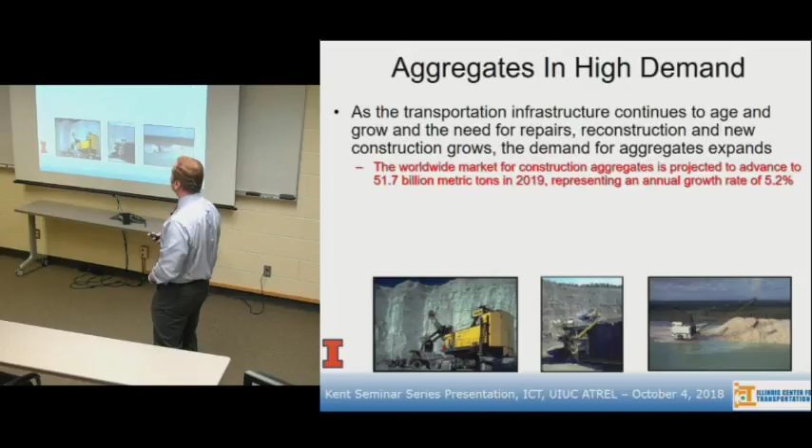The idea is aggregates are always in high demand. It was up to maybe a certain 7% growth rate in the way that aggregates were actually looked at in the worldwide marketplace, construction aggregates in general. Right now, as of recent numbers, I found 5.2% is the current annual growth rate, about 51.7 billion metric tons projected for the production needs in 2019. In the US alone, we have over 3,700 quarries, sand and gravel, and stone producers, and nearly 2.5 billion metric tons were produced in 2016.

If you look at the industry scorecard publication of the National Stone, Sand and Gravel Association, NSSGA, on their website, that's at a value of about $27 billion, contributing almost maybe 5 times that value to the overall U.S. gross domestic product. So what I will talk about has to do with some unbound applications and engineered unbound applications in inverted pavements in my presentation.

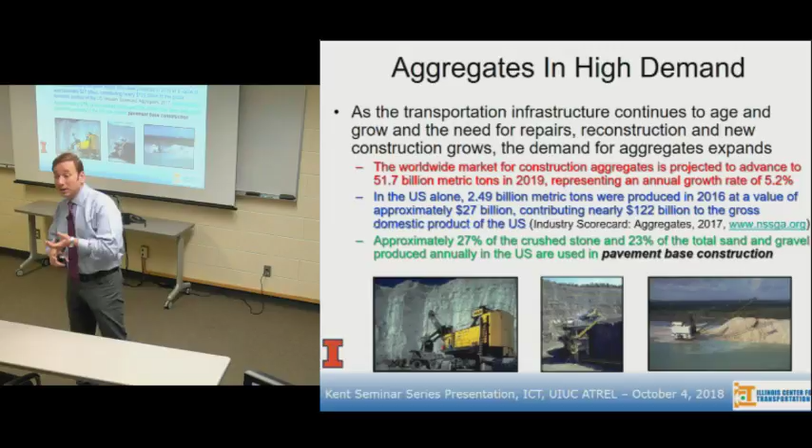So if you think about all these production numbers, approximately 27% of the crushed stone produced and 23% of the total sand and gravel produced annually in the U.S. are used as base course materials, pavement base course construction.

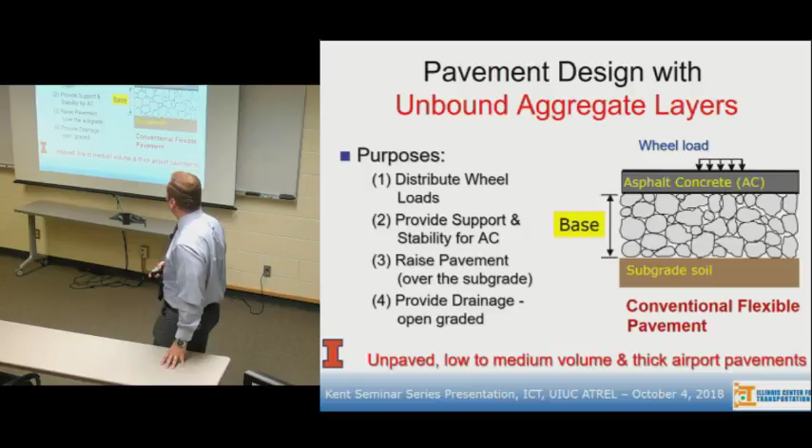That's the inch of aggregate base. We take advantage of aggregate material, crushed stone, especially high quality crushed stone, taking the loads and distributing the wheel loads, and basically carrying all the loads as support for the stability of the hot mix asphalt concrete we build on top. So we're raising pavement over the subgrade this way, and actually in open graded applications it provides drainage as well. But primarily, how strong of a section we build, and what's the function of aggregate in different ways that unbound aggregate, when placed underneath an asphalt concrete and over a stiff foundation, is what we will talk about, which is the inverted pavement design.

And in a lot of cases, thinly surfaced, low to moderate volume roads, and thicker airport pavements. Now, we have a lot to be gained by better understanding, better utilizing aggregate products.

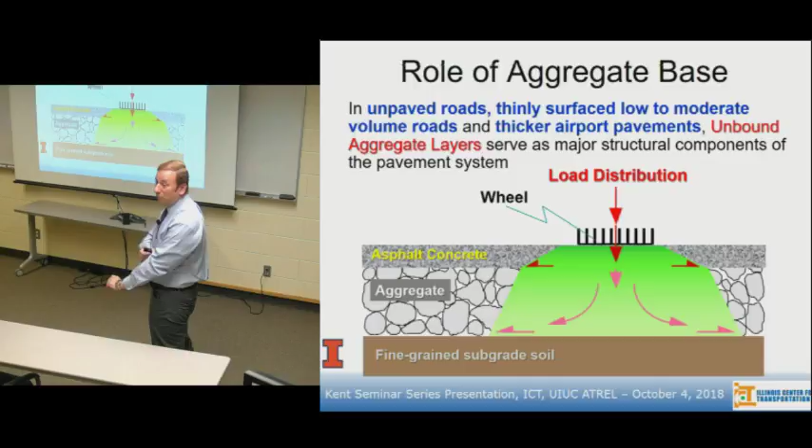So we need to bring a full spectrum of sustainability solutions in the way that we're using and utilizing unbound aggregate materials. Having said that, when you look at the production in the quarries, a lot of those quarries, as I mentioned, they need to be moving into research, and research that leads to advances in aggregate technology and innovative products and applications needed to target specific transportation projects.

We need to bring sustainability by matching future regional needs with the availability of resources. Do we have in a project nearby quarries that will actually produce high quality aggregate for you? If not, where to go and how far? You all know that transportation is a big cost that comes into this. In the production stage, there is the conservation of energy and water and everything else that goes into the sustainability picture.

There is the beneficial use of microfines and quarry byproducts. These are typically the waste material, byproducts generated from crushing operations and multiple crushing that takes place, for producing your unbound aggregate dense graded base course. One of the recent projects dealt with quarry byproduct, which I will also give an example of towards the end of my presentation. So this is the production end.

How can we use these aggregate layers, unbound aggregate layers, in a sustainable way by looking at the current needs and deficiencies or limitations, or current sustainable alternatives to bring recycled material, local materials, and other things? I have 3 slides to just highlight some of the points on these, because I will tie eventually these points to an engineered use of aggregate base, which is inverted pavement design. So when you think about most of the asphalt concrete surface and Portland cement concrete surface pavements, rigid and flexible pavements we look at, these are energy intensive bound layers.

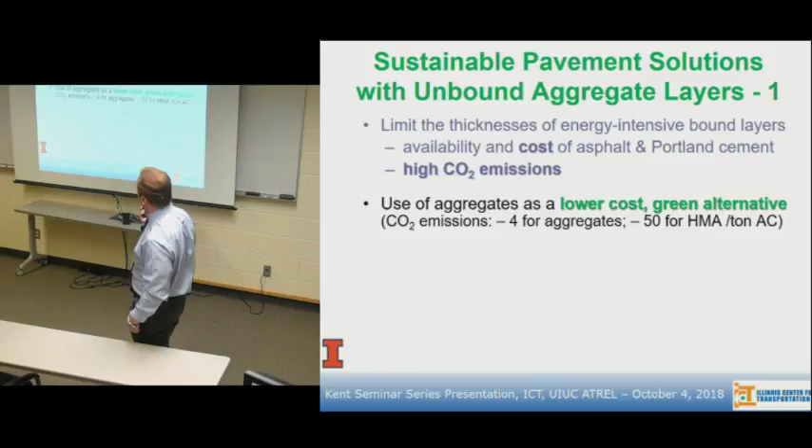A recent report I was looking at gives an overall comparison between aggregate production and hot mix asphalt production. Of course, aggregates are needed for hot mix asphalt. What's the percentage of carbon dioxide emissions coming from each component? If hot mix asphalt altogether per ton is about 50, the contribution from aggregate is about 4. So aggregate production is actually quite sustainable compared to the asphalt binder and the HMA.

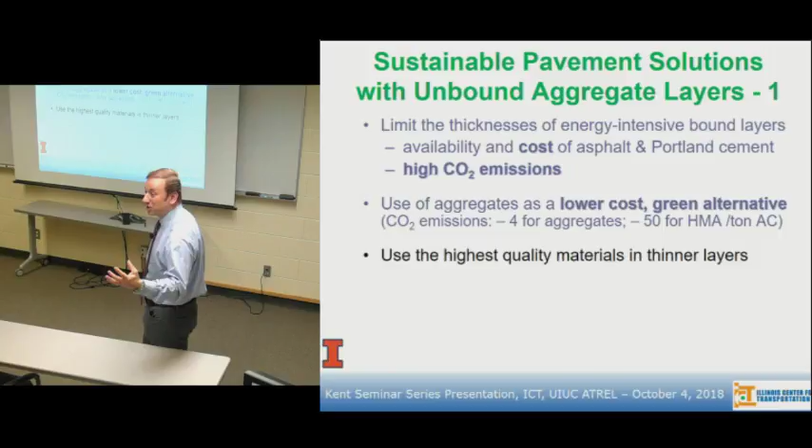So using high quality materials in the right places, say higher quality materials with thinner layers, will help us achieve that perspective — maybe using more aggregate materials with good properties. But we also have the challenge of using a lot of local aggregates, because that's what we have in the immediate surrounding quarries, and most of our quarries are carbonatic rocks. Maybe they're not as strong and durable as some igneous rocks. Local aggregates can sometimes be marginal, but how can we actually make the best use of those?

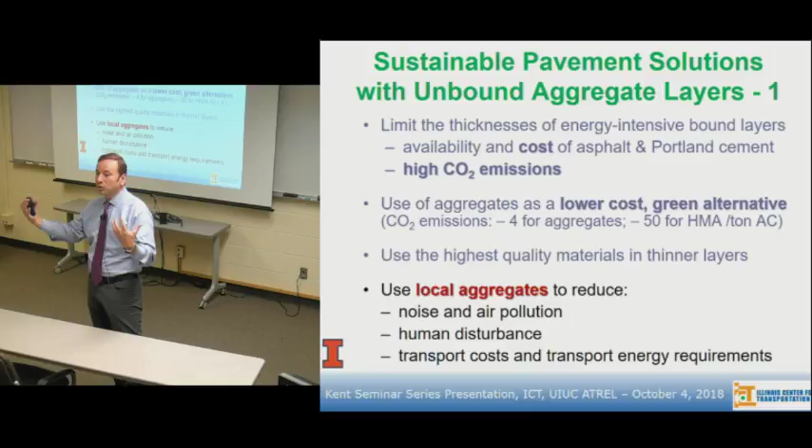In order to do that, there are environmental effects to consider. If you're using local material, you don't have to transport it, so you minimize noise, air pollution, human disturbance, and those kinds of things — but transport cost is obviously the big factor in the final product. So if you're putting this material, not the highest quality but local, under a certain thickness of asphalt, it's going to perform very well since it's not going to get a lot of stress or load on it. So there are clever ways we need to engineer the use of both high quality and lower quality materials to take full advantage — that's the kind of engineered use.

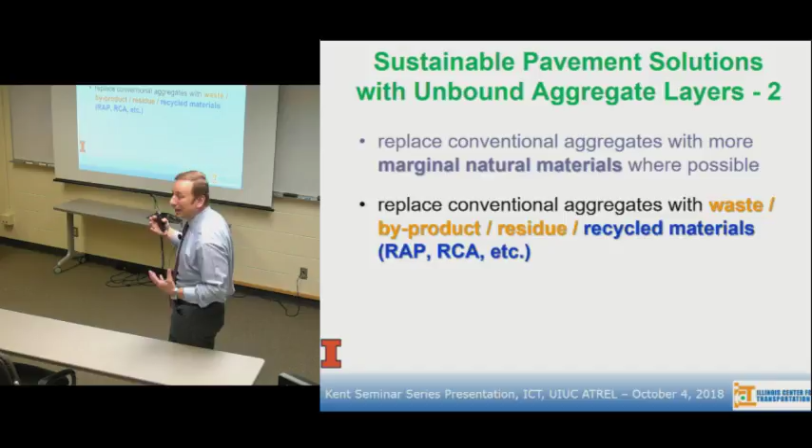Another example is conventional aggregates versus these marginal natural materials as aggregates. As I said, better making use of those in places where we don't get a lot of loading or stresses — they'll perform fine, but you don't want to put them under very high loading conditions.

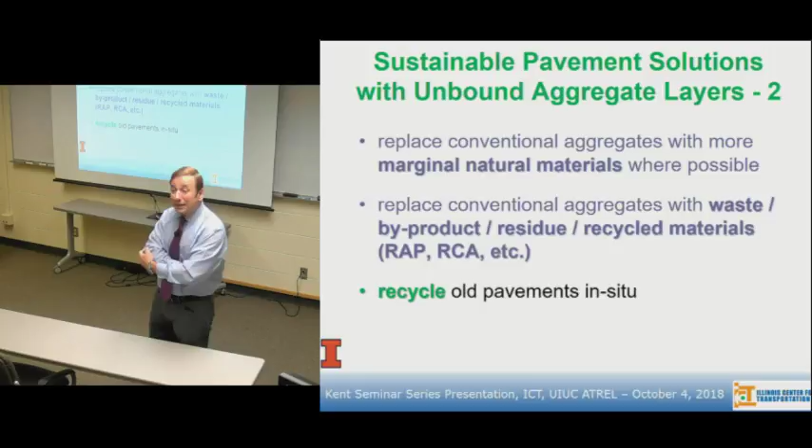We are also under the challenge of reusing and recycling some of the old pavements. That's common as we keep rebuilding, maintaining, and rehabilitating old pavements. Recycling is a big thing we need to bring in — recycled aggregates, RAP, RCA, as well as quarry byproducts and wastes, as I talked about. We have to think more about bringing these into our sustainable solutions. Recycling old pavements in situ — I think Tollway does this in the best possible way up there in Chicagoland. This is the kind of thing we should always be thinking about doing more and more.

Finally, in the third slide of my sustainable solution ideas, that links back to the engineered uses of different qualities of materials, which we can achieve by advancing our ways of characterizing materials and understanding their properties. That really directly links to the topic of this seminar, which is the engineered use of aggregate base in the inverted pavement scenario.

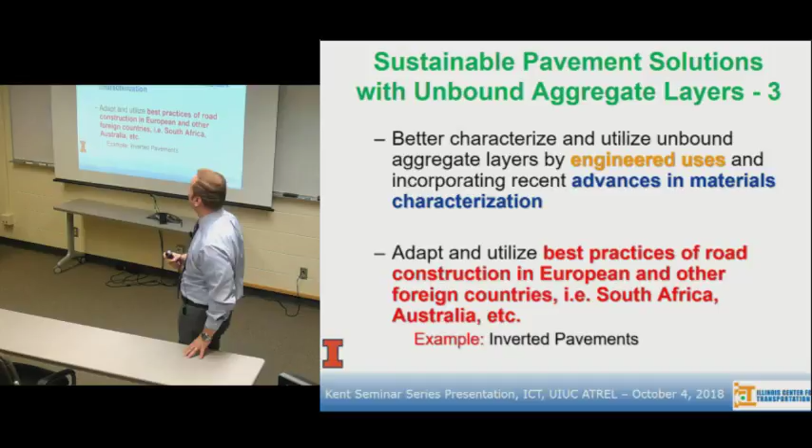Interestingly, back in 2002, there was a scanning tour by the Federal Highway Administration, observed in countries like South Africa and Australia. This was the 2002 report from that international scanning program, which observed in France, South Africa, and Australia some pavements that really outperform their design lives — quite durable, quite long lasting, with great longevity. What do they do to take advantage of these different pavement designs, and how can we bring them to this country? That was the idea of the scanning program.

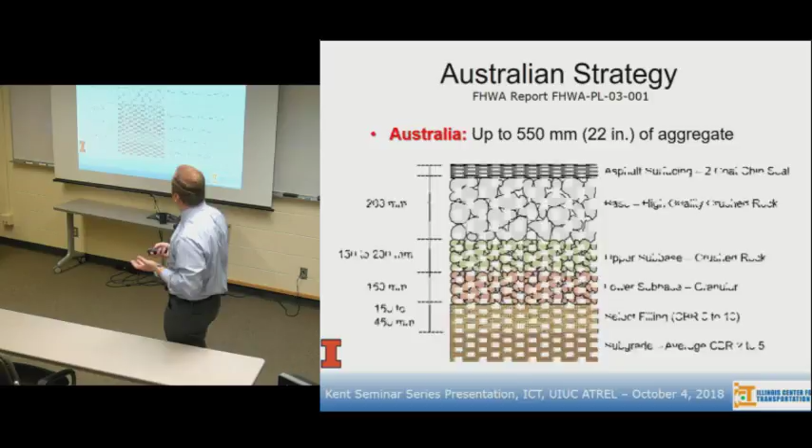What came out of that scanning program, I will show you two countries' designs: Australia's and South Africa's. You'll notice they all build up these pavements from the bottom up, as is the case in Autobahns and German technology. Look at this section, which utilizes different qualities of aggregate material in building up, well, this is a flexible pavement.

It's a flexible pavement, but just like your flexible pavement with surface treatment. It's actually a two-coat chip seal, maybe not more than an inch on top as an asphalt surface. And underneath that, we have up to 22 inches of aggregate layers, on top of the prepared subgrade, with a lower subbase and an upper subbase.

Qualities go from the bottom to the top: lower, upper, and then base quality is quite high, because with that kind of thin two-coat chip seal, there's a lot of stress coming into this granular base. It better be high quality.

This is Australian design, building up from the ground up, and then you don't have such thick asphalt concrete layers. A similar design is South African, and this is the inverted pavement.

This is how they construct it: on top of the subgrade, about typical 6 to 8 inches, 15 to 20 centimeters, of cement-treated subbase. Notice, 3 to 5% cement. What percent cement do we have in concrete? 15, 16 percent, that's heavy. You don't want to go too high in cement content. This cement-treated subbase becomes a stiff platform to build this high-quality crushed stone of only 6 inches, and then 3 to 5 centimeters, that's up to 2 inches of asphalt concrete on top.

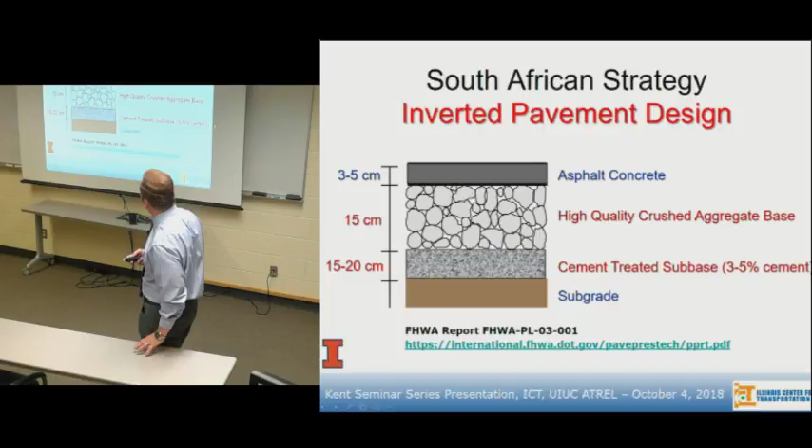Well, it does work because they're doing it in an engineered fashion. They're taking advantage of all the good things in that inverted pavement design, and that way they're spending less money while getting the performance out of that road.

They're green and sustainable alternatives because they're engineered alternatives. They make optimum use of the compressive characteristics of the unbound aggregates. If you look at this cross-section of an inverted pavement, really the neutral axis puts down below towards the subbase. The stabilized subbase, with a higher stiffness, puts the aggregate layer, that 6-inch granular base material, into compression under the bending of the load. That's how the compressive characteristics come in, and in compression, unbound aggregates are great. Not in tension.

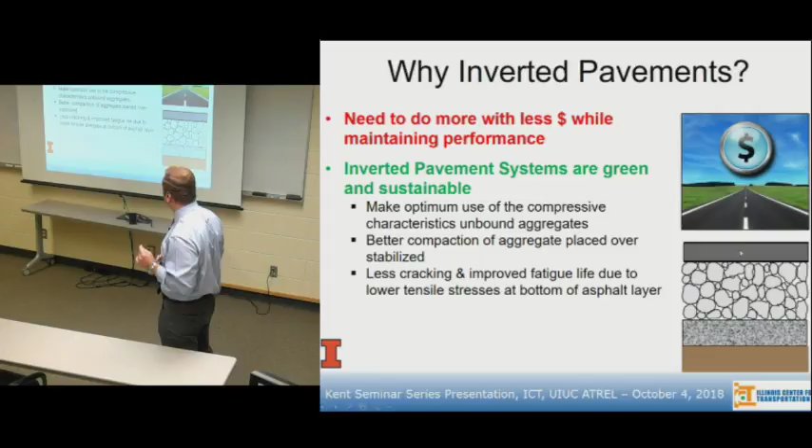The reflective cracking potential is also minimized because you don't have a high cement percentage, only 3 to 5%, lightly cemented, so it's not prone to shrinkage cracks due to low cement content. It does a great job because deviator stress on top of the subgrade from wheel loads is very little, we're talking about 1-2 psi level, because it's already buried under a stiff subbase. The result is improved pavement performance. That's really the key about inverted pavements.

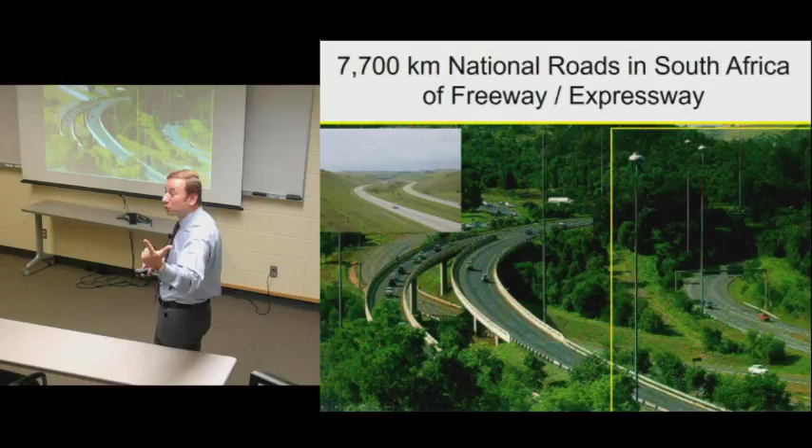I have some slides I'll go through that I borrowed from Dr. Morris De Beer from CSIR, the Council for Scientific and Industrial Research over in South Africa. He was talking about the 7,700 kilometers of national roads in South Africa, giving a picture of how they managed to build all these asphalt pavements, many of them inverted pavements, with a high quality crushed stone base, by material quality as well as construction quality, maintaining high quality base courses.

That's what they call a G1 base. On a typical main national highway, you have 12 to 50 millimeters of asphalt on the surface, almost up to 2 inches, and you can get by with that thinly surfaced asphalt serving high traffic loads.

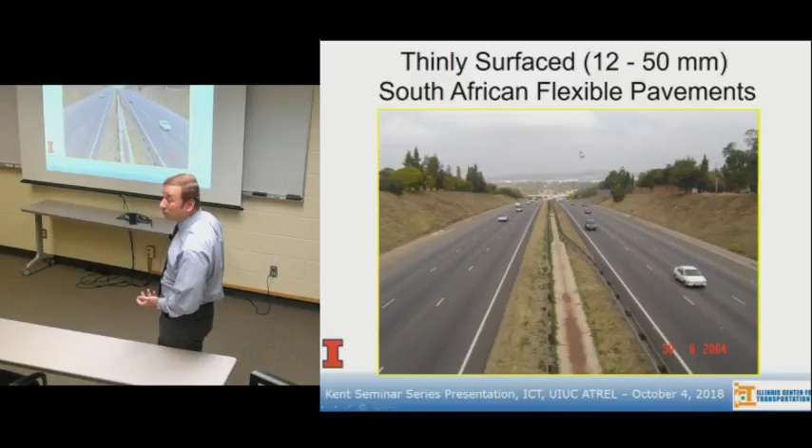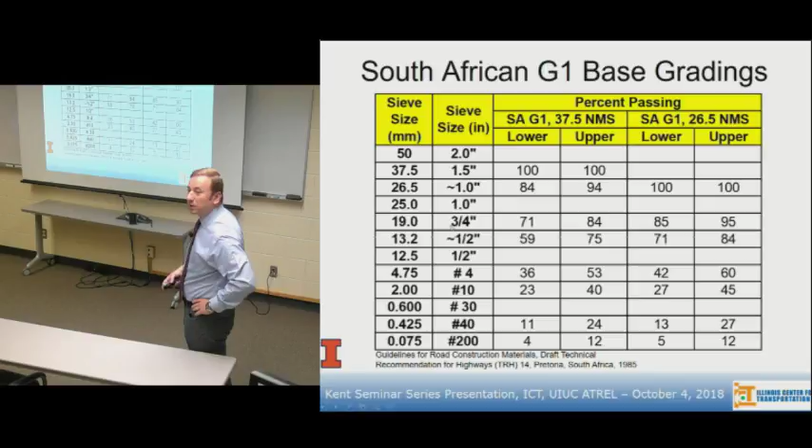Okay, what's a typical grading envelope or grading band for this kind of high quality South African G1 base? They have a nominal maximum top size of about 37.5 or 26.5, so 1 inch, 1.5 inch top sizes. Typically inches are here, sieve sizes, right? And these are typical densely graded bases for well-graded gradations.

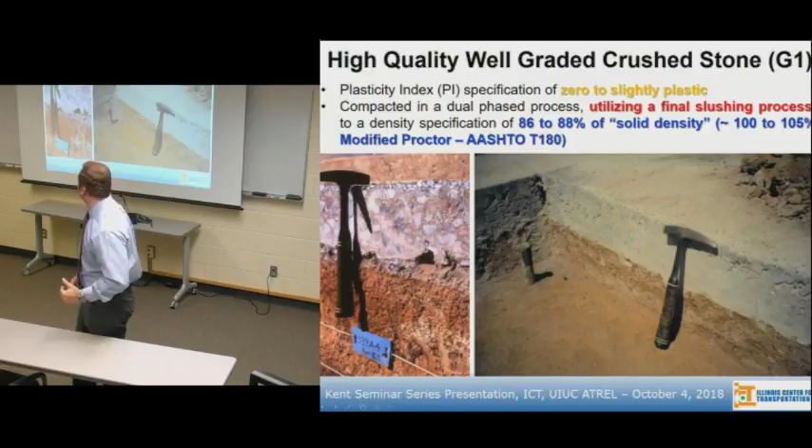This shows you the different stages of the process, but notice this thing, the wetting and slushing, with the rollers actually getting the moisture out full of fines. Basically, they're flushing the fines out once they finish compaction.

All right, there's a quick video here, if I can get that to run, to show you that process, which is very interesting.

The compaction process consists of firstly a standard compaction phase and secondly a particle interlocking or slushing phase. The standard compaction phase uses the customary method of compaction for gravel material to a minimum density level which will allow the second phase to be executed successfully.

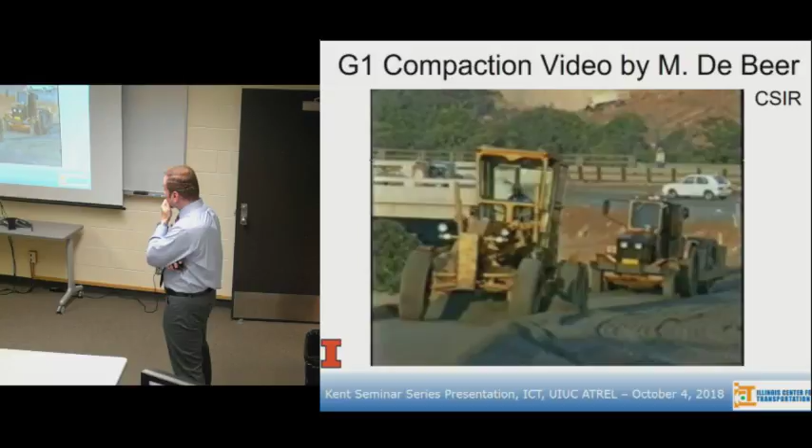The first phase of the compaction process should start immediately after the layer has been correctly shaped. The material should be at optimum compaction moisture content, ensuring that the matrix can be normally compacted to the minimum first phase density requirements. While some deviations to the basic approach to G1 compaction have evolved over the years, mainly being solutions to variations in material quality, available equipment, and local conditions, the original method will be described here.

To start the compaction process, layer shaping is initiated by using a grid roller for 2 or 3 passes at a slow speed to gently knead the material into position without altering the gradation.

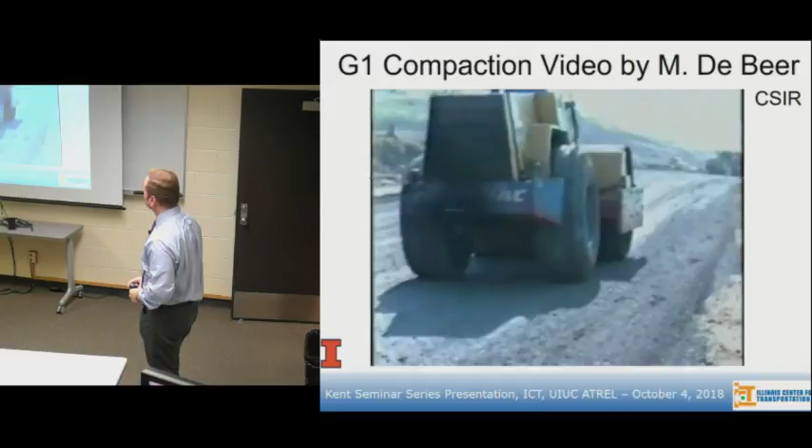Compaction is continued using the vibratory roller. The first pass is normally rolled without vibration, just to settle the material. Thereafter, rolling is done at a relatively high amplitude and low frequency for another 2 to 3 passes. The amplitude is then set to minimum and the frequency to maximum for a further 2 to 3 passes under vibration. Caution should be taken not to over-vibrate the layer and cause de-densification.

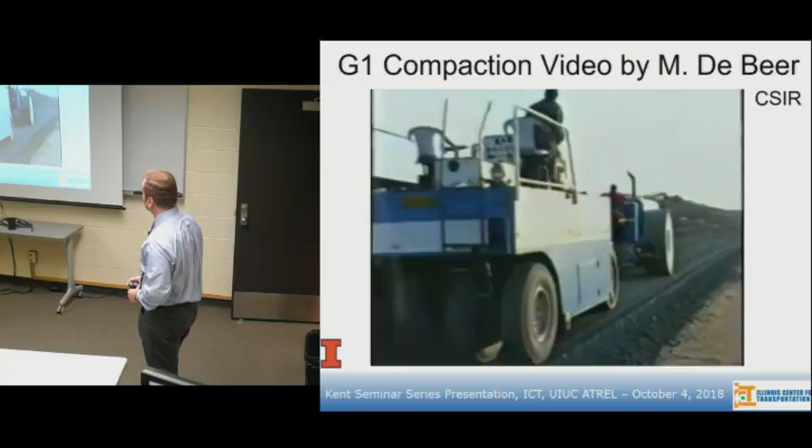Other non-vibratory rollers may assist, especially the heavy pneumatic tire roller. Note that the compaction rolling should start at the outer edges or lowest cross-section side of the pavement and progress towards the center or higher cross-section side of the pavement.

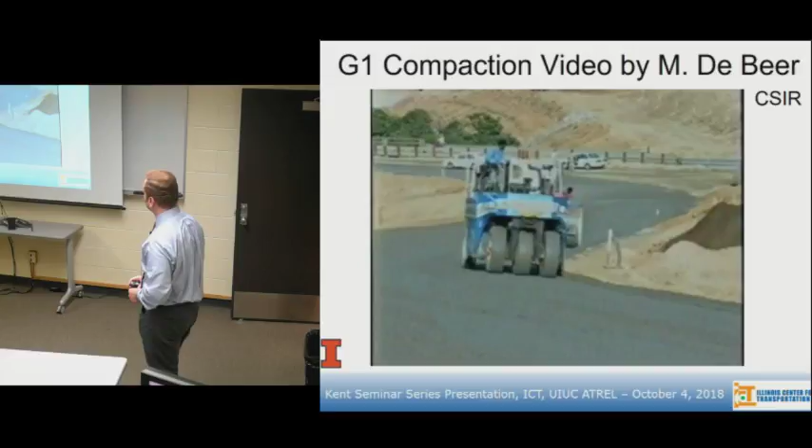Successive passes with the driving wheels leading to prevent bow waving of the material and corrugation formation should be applied in the same lane in opposite directions. Caution should be taken not to crush the particles and hence alter the gradation or to deform the surface.

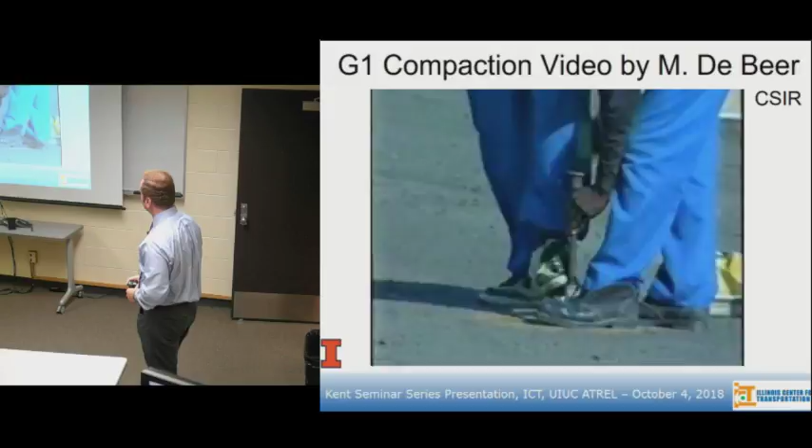The density progression should be randomly monitored after each roller pass to quantify effectiveness and to identify non-productive rolling. The process continues with pneumatic tire rollers in combination with static steel wheel rollers to a density of at least 85% of solid particle density. The layer should have a well-knitted and uniform appearance with the correct longitudinal elevation and cross-sectional form.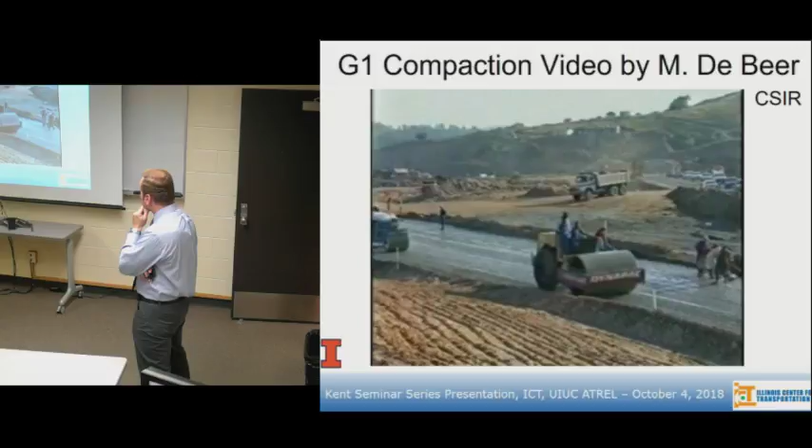The second phase of the compaction process can now begin. The particle interlocking phase involves consolidating the material under saturated conditions by expelling or flushing out the excess fine material from the matrix, allowing the larger particles to interlock into a super dense matrix.

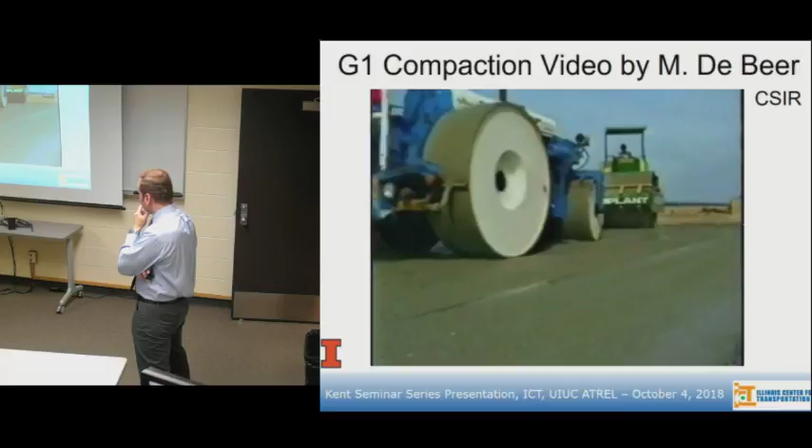The purpose of this phase of compaction is to knit the different sized aggregate particles into a superdense interlocked mass by consolidating the layer and flushing the excess fines out of the matrix. The saturated fines also serve as lubricant in the process of reorienting and interlocking the larger aggregate particles.

The layer must be saturated and flushed in relatively short sections of up to 200 meters, depending on equipment available on site. It is more effective to apply small amounts of water continuously than large amounts at longer intervals.

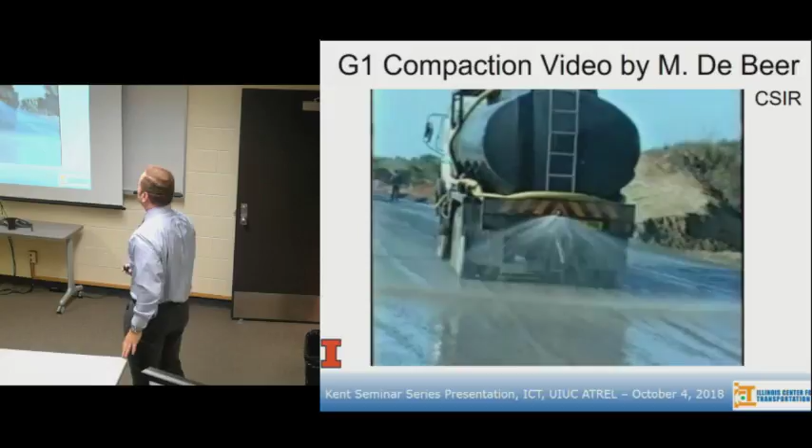It is advisable to apply the water to higher areas of the road and allow it to spread unaided to the lower areas. The shoulder should be breached to allow for the drainage of excess construction and slushing water.

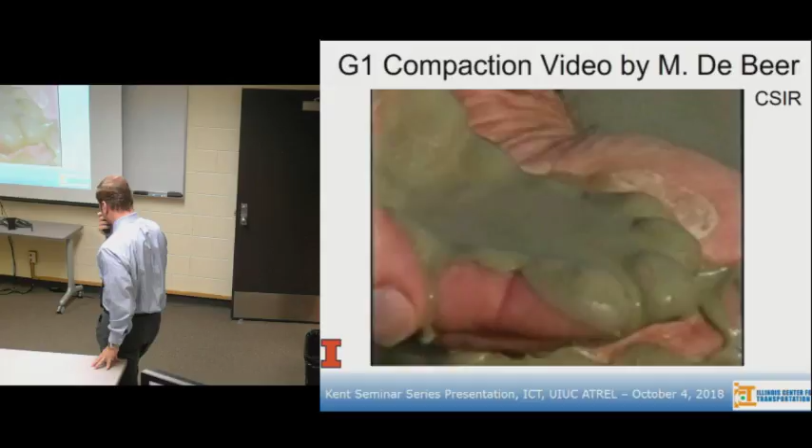The fines form a finely textured, tacky film on top of the crushed stone layer. These must be swept off the road by hand brooms or mechanical rotary brooms.

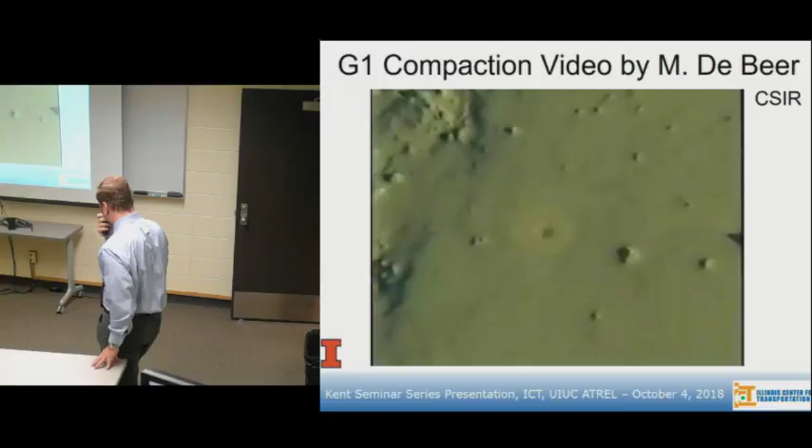Towards the end of the slushing process, the expelled water loses its coloration, indicating that the excess fines have been removed. Air bubbles forming on the surface behind the roller wheels indicate that there are still voids in the layer.

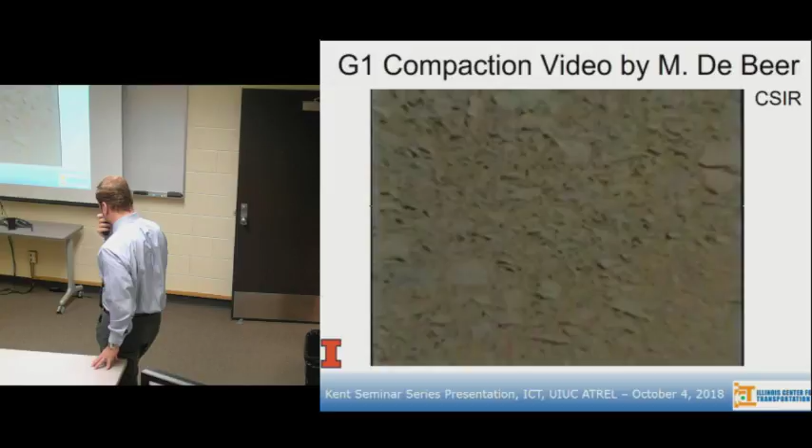The layer should now have a uniform and firmly interlocked mosaic appearance and be allowed to dry off.

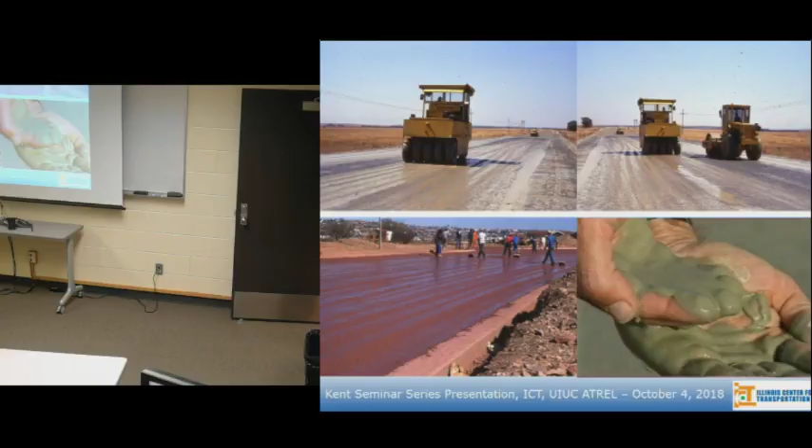All right, I think that's the end of it. It may sound like a cumbersome and long process, but the clever way is actually keeping fines in place to achieve the compaction densities in the first phase. In the second phase, we don't need those anymore, so we get rid of them by slushing, and that's exactly how you get the fines out. It's a beautiful process, a really nice way of finally getting that dried layer. You're almost getting a bound layer like concrete, which is what you see from the trenches.

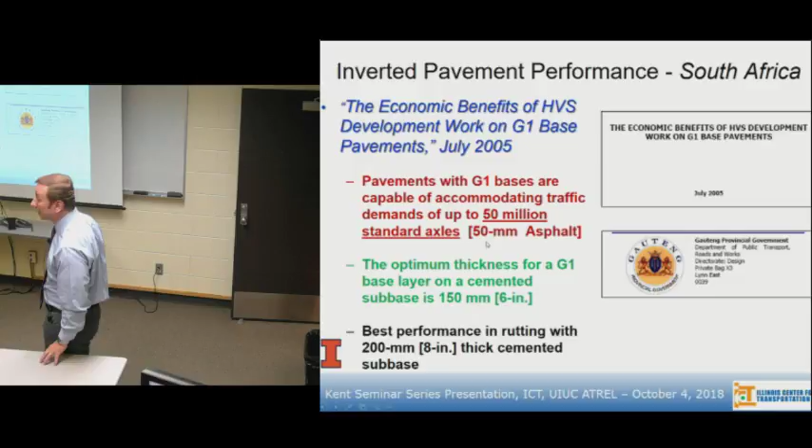So this has been quite successful. There are reports on the economic benefits of HVS development work on G1 base that proved a G1 base built as such on stabilized subbases could carry up to 50 million standard axles with only 2 inches of asphalt surface. Optimum thickness for the G1 base on a cemented subbase is 150 millimeters, 6 inches, and the stabilized layer is about 8 inches thick, according to the optimized values.

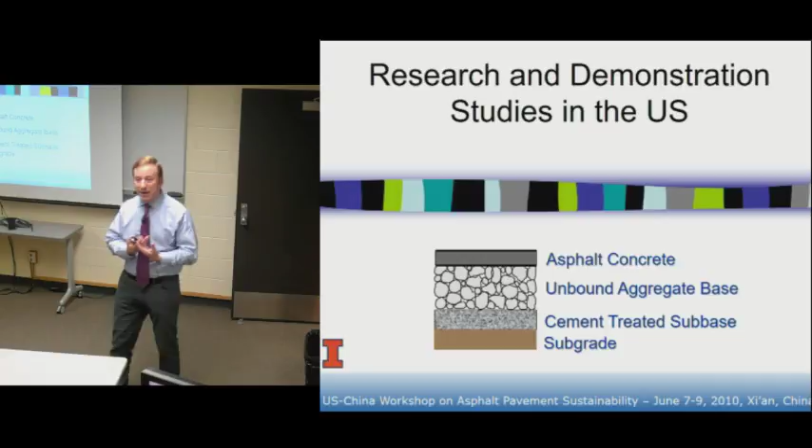Now, if you look at some of the research and demonstration studies in the US over the years, one of the very first studies was done by my advisor, Dr. Dick Barksdale, in 1983 at Georgia Tech. In their lab, under plate loading, they established 12 pavement test sections, several conventional ones, full depth ones, but 2 of them were actually inverted type pavements. I got involved in modeling the behavior of these inverted pavements during my PhD studies, and that's when I developed the GTPave program.

So what I will quickly show you goes back to 1983, as early as the early 80s, Dick Barksdale at Georgia Tech had found that two inverted pavement sections went all the way up to 4.4 million load repetitions and exhibited better performance than the conventional and full depth sections when they were actually built in a test pit out at Georgia Tech.

I ended up modeling these test sections that were conducted by Dr. Barksdale, which had about 3.5 inches of asphalt, 8 inches of unbound aggregate base - that's the conventional setup - but the cement stabilized subbase was about 6 inches on two of those inverted pavements he also tested. These are all the different locations I was modeling with anisotropic base, nonlinear stress dependent behavior, all the things GTPave could do. That was my PhD work.

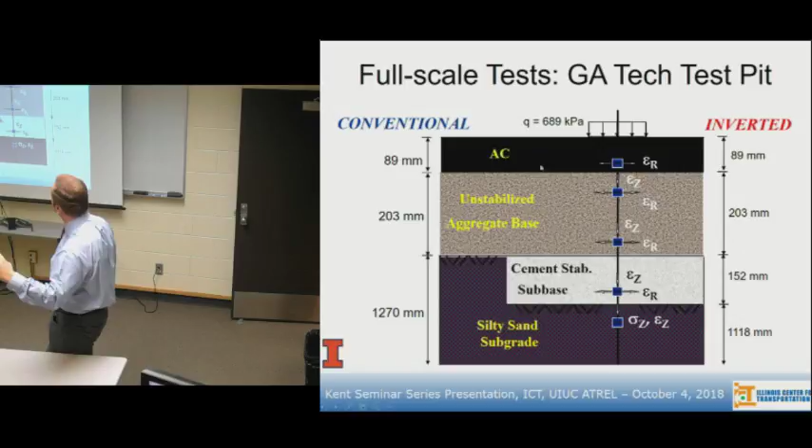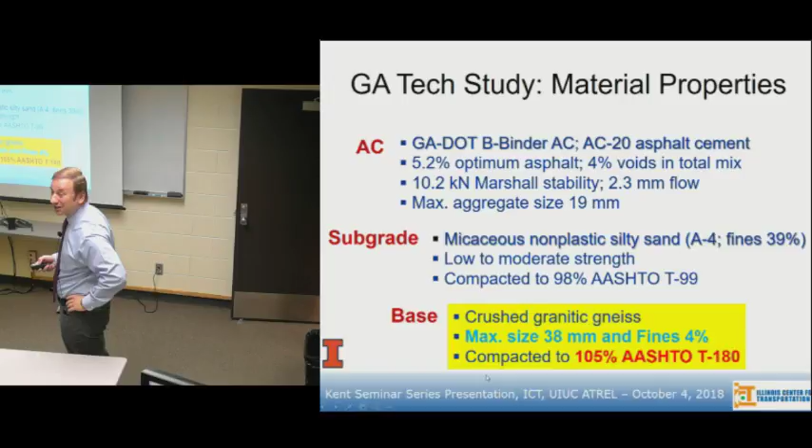I was able to come up with responses predicted at various locations in the pavement. The asphalt concrete was a typical Georgia DOT AC20 asphalt cement and binder, Georgia DOT B binder, 19 millimeter mix. Subgrade was a typical silty sand A4 material from the Atlanta area, compacted to 98% of T99. Base course material was a granitic gneiss, a really nice hard crushed material, and in the inverted pavement sections it was compacted up to 105% as reported.

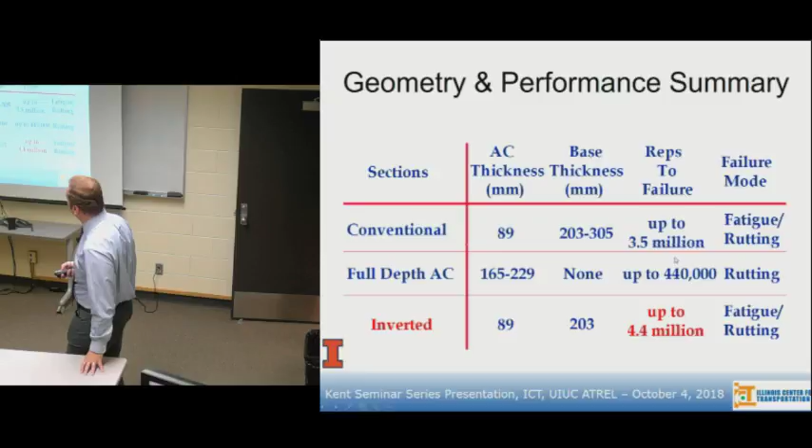When you look at the general performance of these test sections, clearly repetitions to failure - this was a plate load, basically repetition, not a moving wheel load. They were changing the location of the load on that plate so as not to get a punching failure. The inverted pavements, those two sections, went up to 4.4 million repetitions, and the others weren't coming anywhere close - they lasted much longer.

My job was to analyze from a mechanistic point of view all of the pavements, but I did that especially for inverted pavements. Here are some results of some of the critical pavement responses: on top of subgrade, bottom of AC radial strain, and surface deflections.

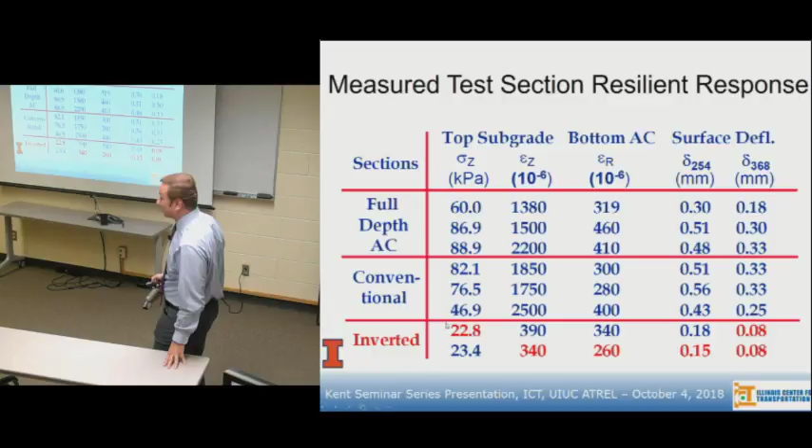When you look at some of those actually measured responses, which my task was to model, these are all measured from instruments installed - pressure cells, strain gauges, and so on. The lowest responses were always coming from the inverted pavements, so this is linked to the better performance. Of course I did modeling of that - I'm not going to go into details, but these are some of the slides I presented back in 1995, 23 years ago, when I was a PhD student at TRB.

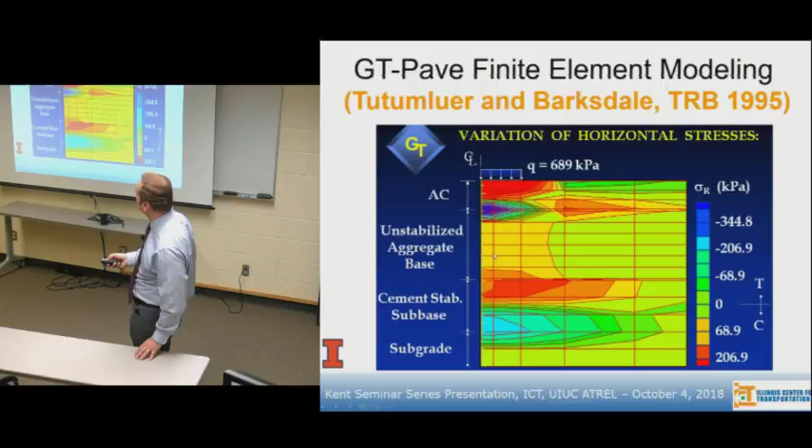That's the cross-section of the FE mesh for those test bed sections of Professor Barksdale's, and we published that paper. Interestingly, when we look at the inverted pavement sections - this is the cement stabilized subbase, this is the unbound aggregate base - looking at the lower ends of the unbound aggregate layer, usually that's where you get tension. These are horizontal stresses, and there's nothing - these are all in compression. Compression is red and yellow all the way to zero, and anything going towards blue from yellow zero is in the direction of tension. So you don't see any tension in the horizontal direction in the aggregate base - that's a really good thing.

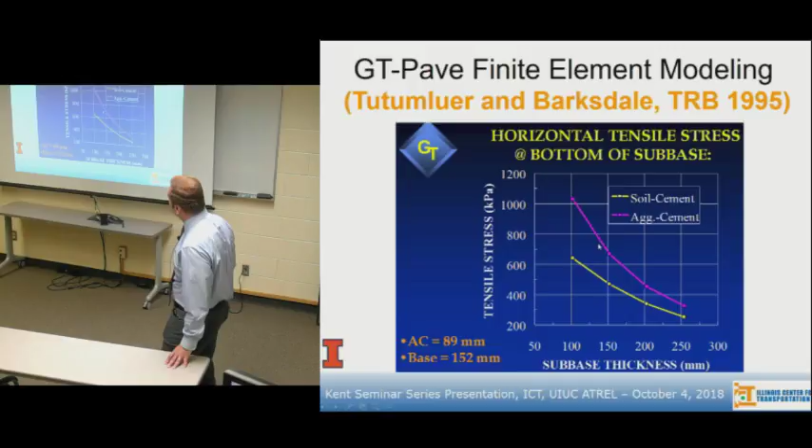Looking at tensile stress at the bottom of the subbase. Soil cement being a little stronger layer has higher compressive strength, and aggregate cement being a little higher still. So you're getting slightly higher tensile stresses generated in the aggregate cement as compared to the soil cement, for horizontal tensile stresses.

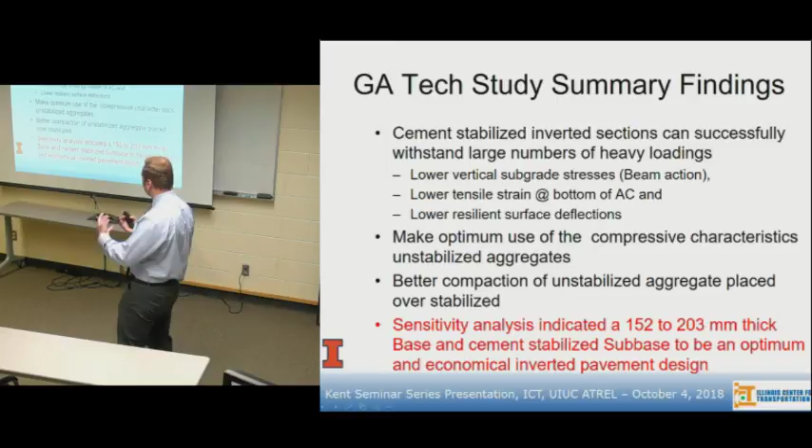Finally, the summary of findings from my work at that time was that we were able to model some of the much lower responses as measured from the test bed sections. I was able to show that our aggregate base was entirely under compression, which is the best way to get the most out of your aggregate base. Sensitivity analysis came up with 152 to 203 millimeters, about 6 to 8 inches of base course, and the cement stabilized subbase was an optimum and economical inverted pavement design, which agrees well with almost 30 years of experience of the South Africans.

Other applications in the U.S.: Louisiana is very well known for their famous stone interlayer pavement. What that really is, is an inverted pavement - 3.5 inches of HMA, 4 inches of crushed limestone, 6 inches of soil cement underneath. That's the same inverted pavement design section, just little differences in the thicknesses.

Here is a report from 2001. They have their ALF machine, an accelerated pavement testing machine. With the ALF, the stone interlayer system - what they call the cement stabilized subbase - the inverted pavements carried over 4 times the ESALs of conventional pavements before failure, whatever failure they were looking for, fatigue or rutting. 54 projects were actually constructed, totaling 612 lane miles from 2003 to 2007. It's very highly favored in Louisiana.

Now, it's also a hot, warm climate in Louisiana, not many freeze-thaw effects. When I checked with the northern states, there's always the question about Minnesota, Illinois. Cement stabilized subbase can crack on you a lot if you don't limit the cement content - it's not going to get as rigid, and you're minimizing the cracking potential with low cement. You don't want to exceed 5% at any time.

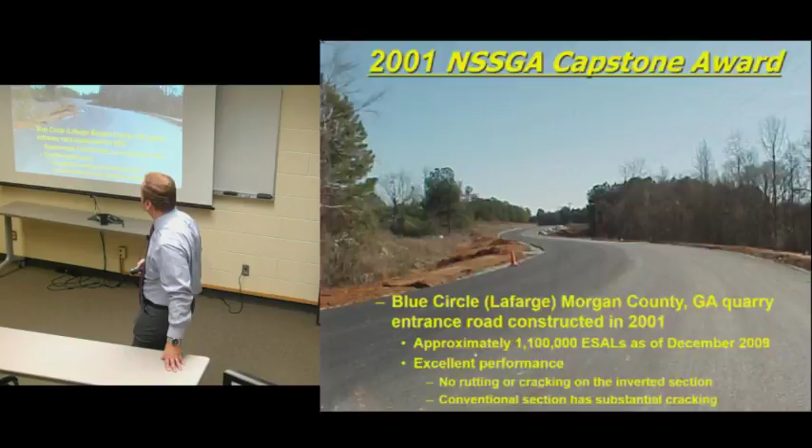Conventional section has substantial cracking. Well, you will say, okay, this is a quarry road of an aggregate producer, not an official state highway like with a transportation agency. I'll get to a similar one in Georgia that was constructed by Georgia DOT as well. In that road, they used both the Georgia DOT compaction method and the slushing technique they tried.

Here is a typical cross-section of the compaction method. According to Georgia DOT, they used 3 inches of asphalt, 6 inches of aggregate base, 8 inches of cement treated base, and an interlayer of 2 inches of graded aggregate base filler over prepared subgrade. They did both the slushing technique with the South African inverted pavement design, and this Georgia inverted pavement design that didn't have the slushing.

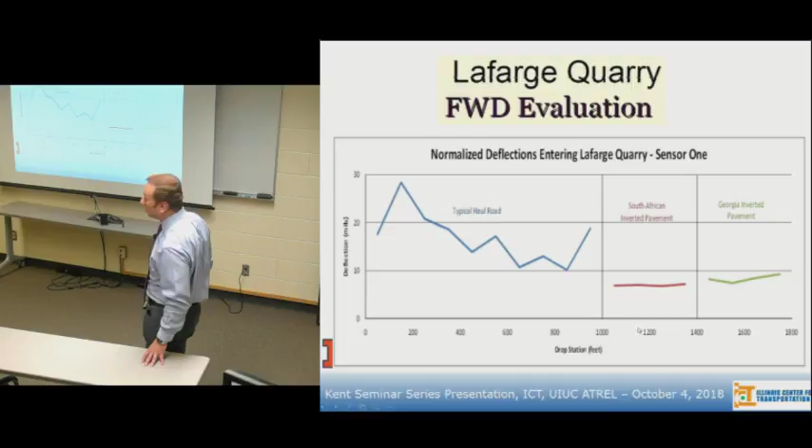This is compared to the conventional pavements of the typical haul road at the quarry road. These are FWD readings, deflections, normalized deflections entering the Lafarge quarry. Look at the deflection levels - these are centerline deflections from FWD testing, much lower. And even with the typical Georgia compaction procedure, not the slushing, they were able to achieve that.

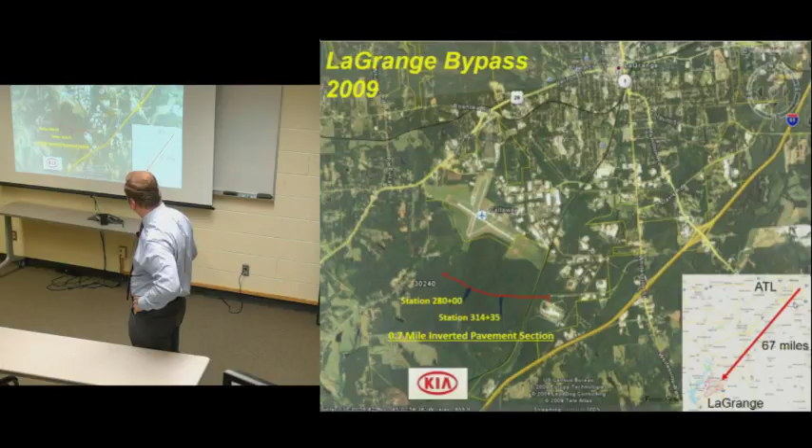Georgia DOT took on the request of the Georgia Crushed Stone Association, and in this case there is a LaGrange bypass near the city of LaGrange, south of the city, in Georgia, where Georgia DOT constructed 0.7 miles as an inverted pavement test section. That's the stretch of the actual project. Just to show you where it is - this is the city of LaGrange on this Google map, and the project is highlighted right here south of the airport, the 0.7 mile inverted pavement test section, a brand new pavement constructed as the bypass loop. LaGrange is actually 67 miles south of Atlanta, to give you a perspective.

Look at the test sections, typical cross sections. The inverted pavement section compared to the original design, which in this case was a Portland cement concrete rigid pavement section. So instead of 9.5 inches of PCC, 10 inches of aggregate base over a prepared 6-inch subgrade for a soil support value of 5, they went over to an inverted pavement design with a rather thick 10 inches of cement treated base, 6 inches of unbound aggregate base, and then 2 lifts of base and surface courses of superpave mixes, 2 and 1.5 inches.

So this is a typical inverted pavement. The only difference from the South African version is it's about 2 inches thicker here.

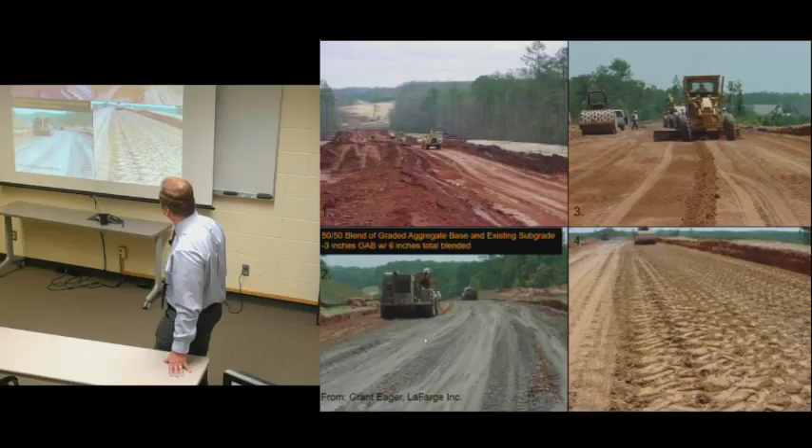There are some construction pictures of this road. In some cases, the subgrade conditions were not that favorable, so they had to do subgrade improvement by blending with aggregate. This is still the subgrade because they had to achieve the subgrade soil support value of 5. Ohio DOT also uses this.

Again, some more pictures from the LaGrange bypass. Right here is the final road as built, the inverted pavement section. And the comparison with what it would cost if they constructed a PCC pavement at that location versus what the inverted pavement cost -- this is a net 30-year life cycle cost estimate of about 139,000 dollars in net savings. That's what they reported in this case.

The final thing I'll talk about is a more recent project with Luck Stone, a major quarry company. Luck Stone had an expansion project at their Bull Run quarry in Manassas, on Highway 659 bypass in Virginia, just outside Washington D.C. Randy Weingart was the director of their materials management and product research at Luck Stone. A few years ago he retired, and he's now with National Stone, Sand and Gravel Association.

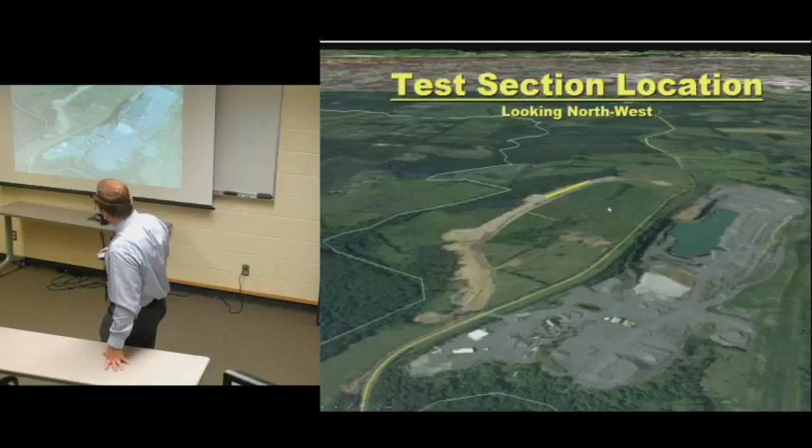Because the realignment allowed for expansion, they had to chip in and actually build the road, getting support from Virginia DOT working with them. But it wasn't just Virginia DOT -- they extended their arms over to the Federal Highway Administration's Turner Fairbank Lab, and some of our friends from Turner Fairbank partnered in this effort, putting forward funds for instrumentation, instrumenting the inverted pavement test sections.

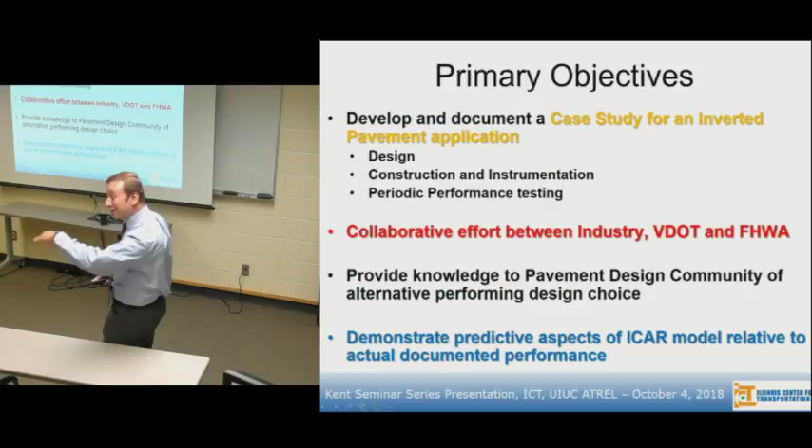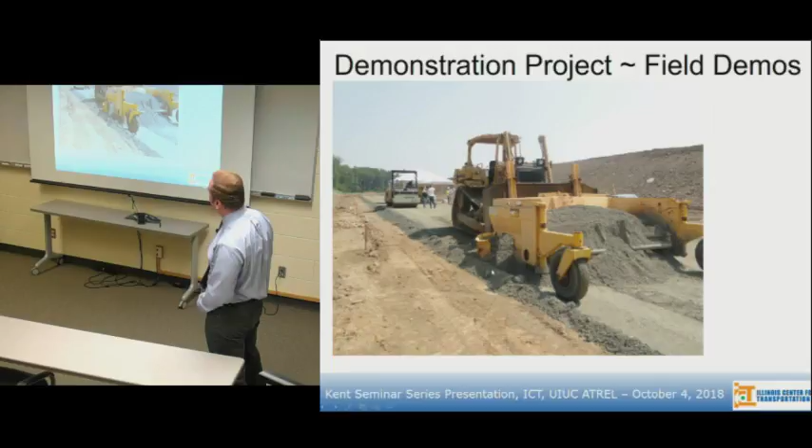I was involved in a one-day demonstration project they did back in 2011, and I was there presenting as well. This was in Manassas, Virginia. On site, we ended up seeing a lot of the construction, as well as some of the instrumentation that FHWA was installing. We were able to monitor some of those things on site. So these are some photos from those efforts to share with you -- that's the instrumentation, the strain gauges for asphalt.

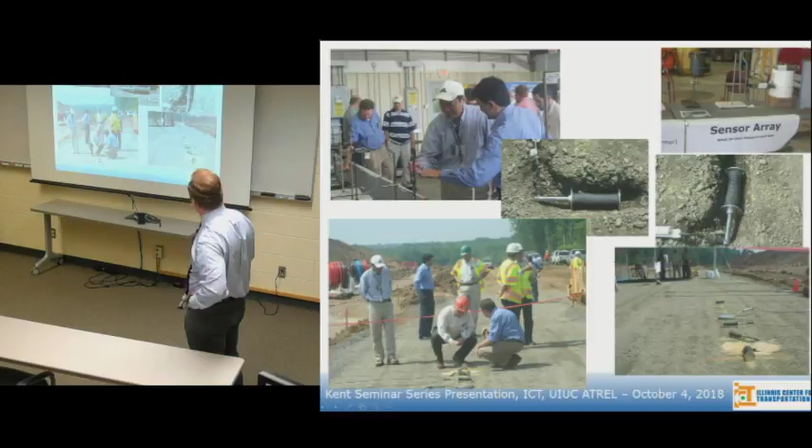And then there's Nelson Gibson at that time with Federal Highway Administration, and Steve Meininger also here, some other researcher colleagues, again from University of Texas El Paso, Reza Ashtiani is there. So some of you know these people well, and as part of that there's a demonstration of the different gauges and instruments.

Strain gauges, pressure cells, as well as Virginia DOT's traffic counting system, the weigh-in-motion system, was also installed on the site. This is a compaction demo they did with nuclear gauge, sand cone, and so forth, plus FWD testing.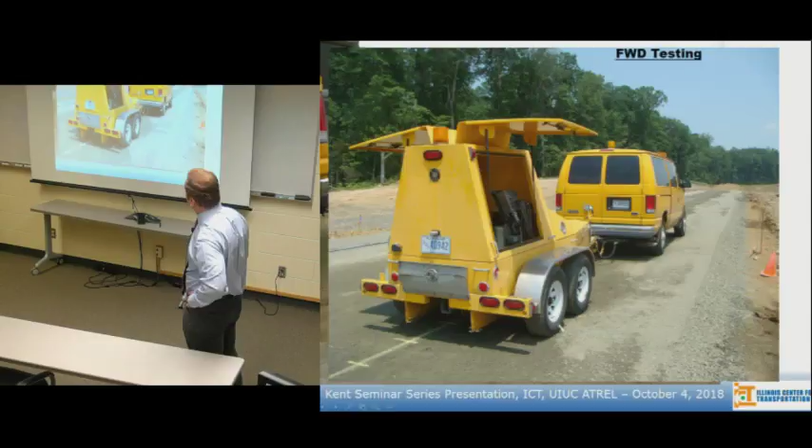There was all the data collected from the Bull Run test sections. I don't have that here. Hopefully we'll have Randy Weingart here for a future Kent seminar to talk more about what they found from that study.

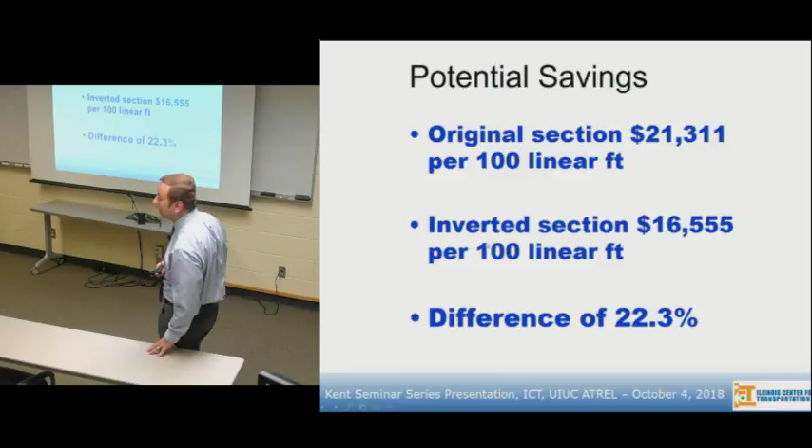But clearly, a cost comparison they did showed that the inverted pavement section had a 22% difference in cost and was cheaper to build compared to Virginia DOT's typical design. The last item I'd like to talk about on inverted pavement is that we took the advantage of testing this technology in our own backyard.

That relates to the current project we're just finishing up. We just finished it, actually, and the report is up on ICT's publication page, you can download it. This is a study I partnered on as investigator with Dr. Hasan Ozer, and Issam was the graduate research assistant.

How can we use quarry byproducts in sustainable applications? We know quarry byproducts are waste materials, but that's not how the producers look at it—this is good sand-size material, anything passing 6 millimeter size, typically less than number 4 sand-size material.

With that kind of encouraging result, how can we put the use of quarry byproducts to the test in our full-scale validation study? That's the 168 study I mentioned, which considered four different alternatives, and one of them, as you can see here, is the third one.

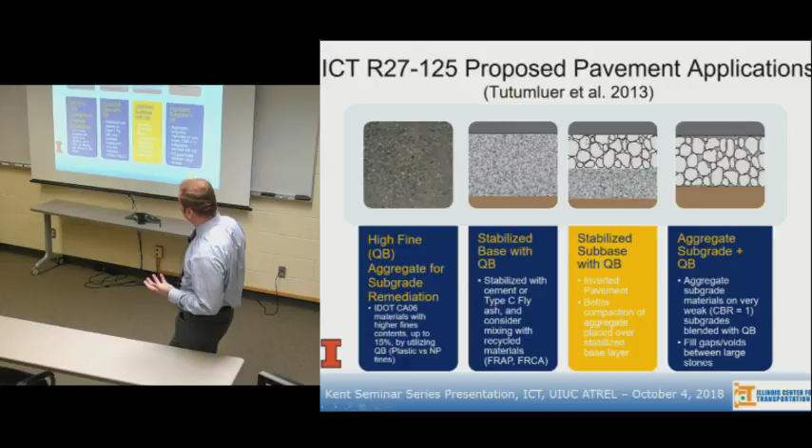The third one being stabilized subbase with quarry byproducts—basically using quarry byproducts as sand size, stabilizing it with cement and fly ash, putting a granular base on top, and about 4 inches of asphalt on top. That's an inverted pavement we also built in our cell 3, and that's the configuration right here.

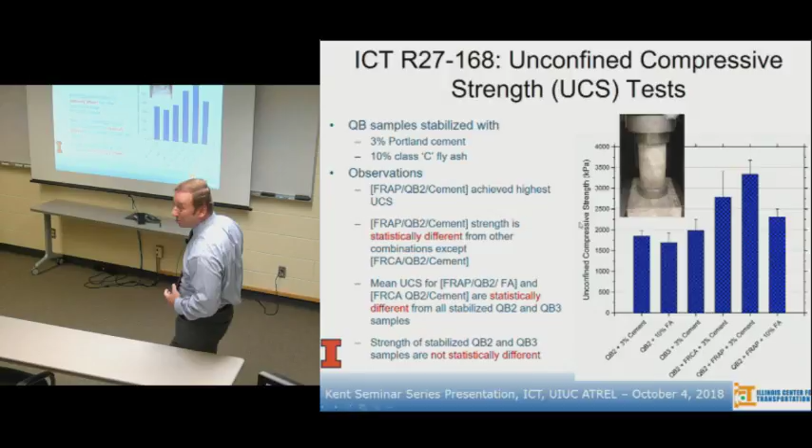To report how those inverted pavements performed—well, we knew they would perform well because we tested the material in the lab with different options of 3% cement and 10% fly ash. These are pretty high compressive strength numbers, and we knew they would make a good cement-stabilized subbase for the inverted pavements.

It's always a challenge on a project with very short test sections to do the proper batching, and we had a great contractor who worked with us diligently. The way we proportioned all the materials—quarry byproduct and cement percentages—and brought them together in our backyard parking lot, then paved them down as stabilized layers with a tiller, was a wonderful experience, especially for quality control.

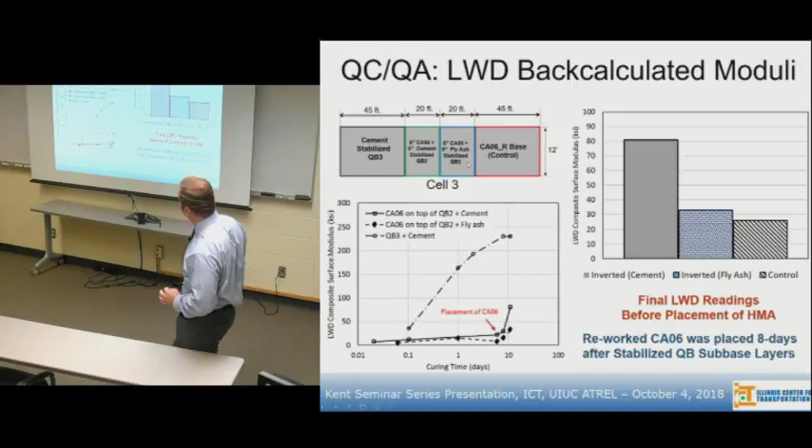Quality control showed that the inverted pavement with cement and the inverted pavement with fly ash had quite good, acceptable modulus properties for the stabilized subbase in this case. There's more of this in the report, but when we started running the ATLAS—I'm sure you've all seen the ATLAS wheel running.

Not sure if this will work now. Oh, no, I don't have that video.

That's how we tested the constructed test sections with 4 inches of asphalt on top, using the laser profilometer to get the profile readings. This is Issam doing that on a platform section. We went all the way up to 135,000 passes, and even after 100,000 passes we increased the load level from 10 kip to 14 kip to accelerate the rutting process.

What you're looking at here is from cell 3. Basically, these two are the cement-stabilized layers.

6 inches of aggregate base underneath, 6 inches of cement stabilized, or 6 inches of fly ash stabilized. So when you look at the overall end result, 135,000 passes, this is the fly ash stabilized inverted pavement, right about a little over 12, maybe 13 millimeters rutting at the end of 135,000 passes at the high load levels of 14 kip.

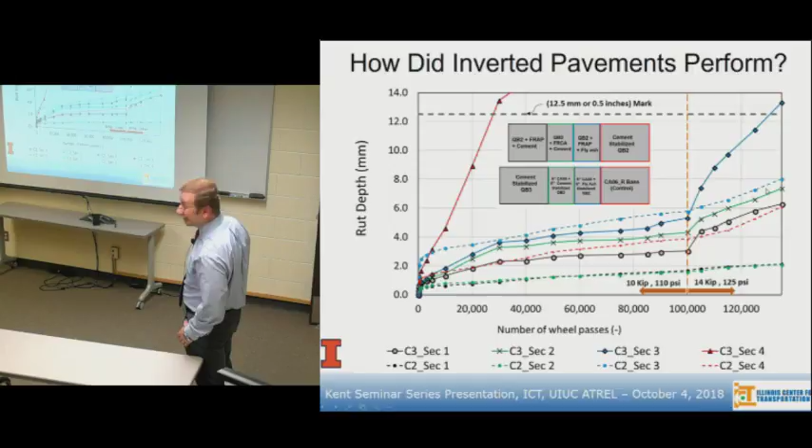The cement stabilized inverted section, this is the green one here, goes much lower than that. Indeed, these are the cross sections. This is the cement stabilized subbase cross section in our backyard, and this is aggregate base. Just only 7 millimeter rutting after 135,000 passes. I think this is very adequate for local agency construction.

Low volume road, local agency construction, I think this is a great typical pavement section to construct. Even in the case of fly ash stabilized, which was weaker than the cement stabilized one in our case, we found the 13 millimeters, around 0.5 inches, is still a good target for really harsh 135,000 passes at 14 kip loading.

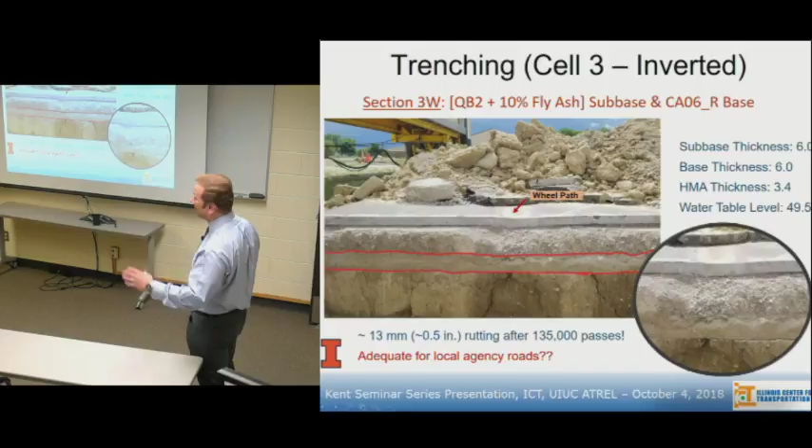Overall, I think inverted pavements do very well. I know I'm coming to the end here, about an hour now. But I want to mention to you in one slide what others have been doing and where we are with inverted pavement sections. This is the last slide.

Tennessee DOT looked at a 1.7 mile road that was laid back in 2012. New Mexico DOT did another one also in 2012, and this is now finished of course. We're getting really good data out of how these inverted pavements New Mexico constructed have been performing.

About 3 years ago, there was a great session at TRB on inverted pavements put together by AFP70, the Aggregates Committee. An engineer from New Mexico DOT showed the good performance of this inverted pavement section, which is at a rather high altitude, 7,800 feet elevation. They get really harsh winters there, even in New Mexico at that elevation, and inverted pavements didn't show signs of cracking. I think that's a good thing.

There's a potential pooled fund project statement that's been going around for several years, still a potential. There's recent interest from Georgia Tech and Georgia DOT researchers to do more with inverted pavements. And also about 5 years ago, I believe Vulcan Materials had another demonstration project in North Carolina that showed really good performance of inverted pavements.

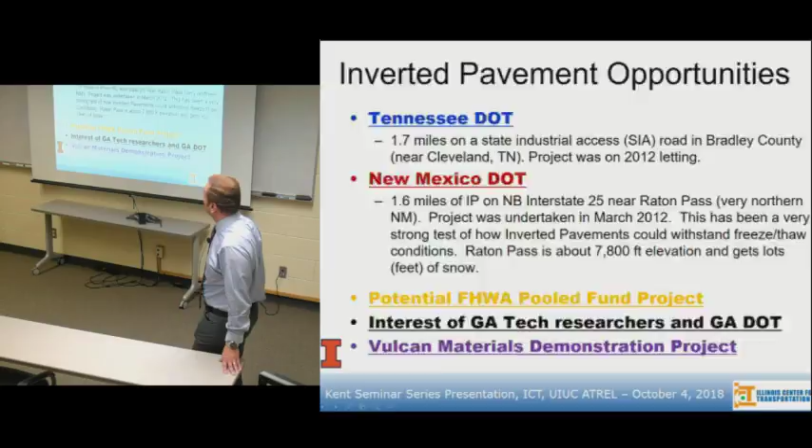Altogether, I think inverted pavements are a good alternative. It's a sustainable alternative that utilizes engineered application of an aggregate base over a cement stabilized layer. And when everything is constructed right, you've seen examples, this is truly a winner pavement test section construction technique and design alternative. Thank you very much for your attention.

Does anyone have any questions for Professor Tutumluer?

I think it was right when you introduced that South African section with the slushing that you talked about a surface treatment of 12 to 50 millimeters. That 12 millimeters, that's probably not an HMA, right? You said something about a chip and seal type thing. I just couldn't practically see how you could put down half an inch. That's right. The question was, again, in the South African practice, 12 to 50 millimeter surfacing on top of the aggregate base, which is supposed to be an asphalt surface, right? The 12 millimeter is our surface treatment, basically.

Whether it's two layers, two chips, or one, it's just 0.5 inches basically, that's not a structural layer. Even the 2-inch or 50 millimeter one would be a thinly surfaced pavement consideration, where actually bottom-up fatigue cracking is not a problem because it conforms to the shape of the underlying support. Again, bottom-up fatigue, as we know, is not a problem. So I think that's where they're coming from, but the 12 millimeter is surface treatment.

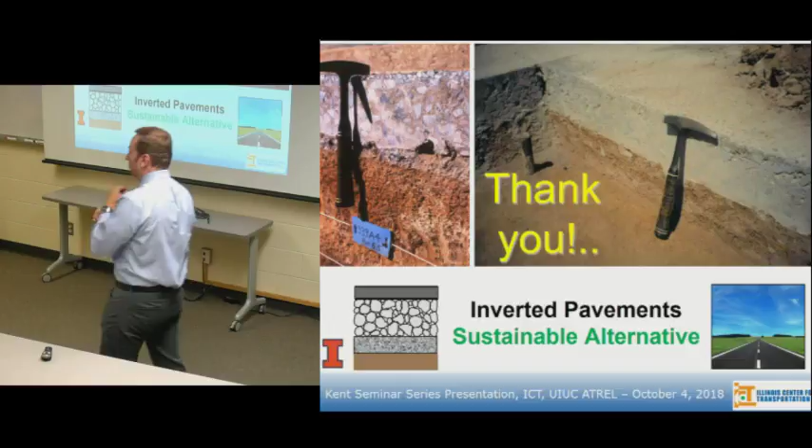That's a good question. In your question you're comparing high quality versus medium or low quality aggregate. When we say high quality, we like to go to hard rocks, like igneous trap rock in Wisconsin, granite material in North Carolina or Georgia. From Georgia Tech's experiment, they had good quality, high quality igneous rock, hard rock. That's an excellent question. Georgia had the same kind of granite for their projects.

We need to check whether some sedimentary rocks, some carbonatic rocks mostly produced as limestone or dolomite type, like what we have in Illinois, would go through the compaction process. If you had to do slushing, for example, how would they survive and lock up, the interlocking after slushing they were talking about?

That's a very interesting question. I don't know the answer to that. We need to experiment more with that.

However, what we know is that although Georgia DOT's typical design was applied in the whole road section, there was a slushing technique they tried to apply, and the typical compaction of the aggregate base according to Georgia DOT standards. Both were quite low with the FWD deflections. So whether or not we have to go through slushing, we may not be able to do it as good as the South Africans, but even typical base course construction achieving high enough density may be enough, because we're achieving quite high densities now over a stabilized sub-base.

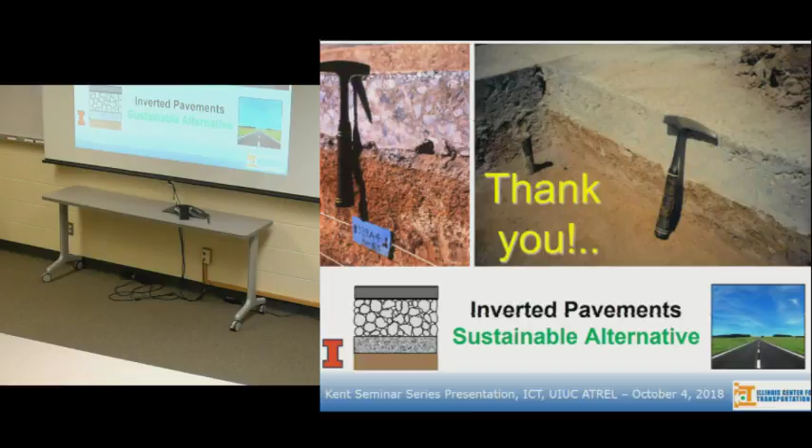Even in that case, going back to some semi-rigid designs, like heavy-duty cement stabilized base courses in China, which has been a classic approach - under asphalt concrete, putting a high cement percentage stabilized base - that has very drastic consequences, large cracks coming into the asphalt.

What they did, and I know this as a fact, they started putting an interlayer of unbound aggregate on top. So they really pushed their base courses, heavy-duty cement stabilized, to sub-base, and they were able to prevent some of the reflective cracking in the asphalt by putting an interlayer of unbound aggregate under the asphalt in China.

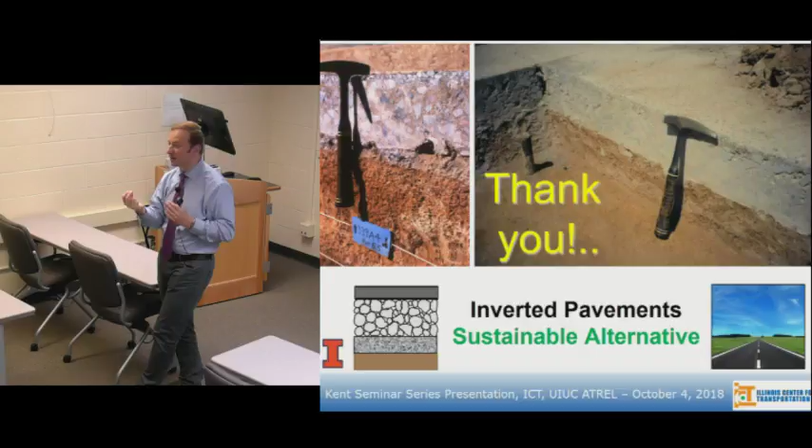So again, with 3 to 5% cement, the cracking, if you ever get cracking in cold northern climates, it's not going to reflect to the asphalt with a 6-inch aggregate base under the asphalt first. That's my opinion.